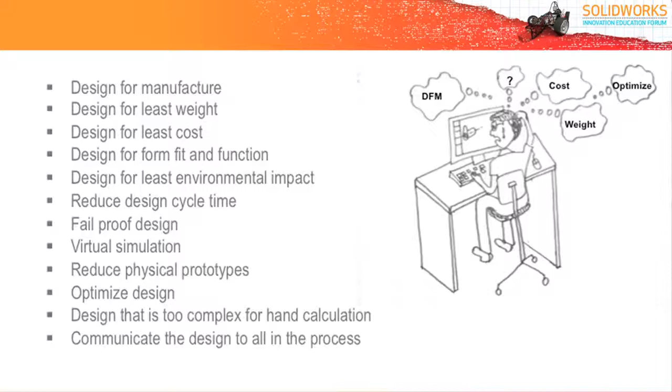Let's move on. So what are the industry expectations? One is design for manufacture, design for least weight, design for least cost, design for form, fit and function, reduce design cycle time, design for least environmental impact, fail-proof design, virtual simulation, reducing physical prototypes, optimizing the design, design that is too complex to do using hand calculations, and above all, communicating all this design to the other people in the enterprise.

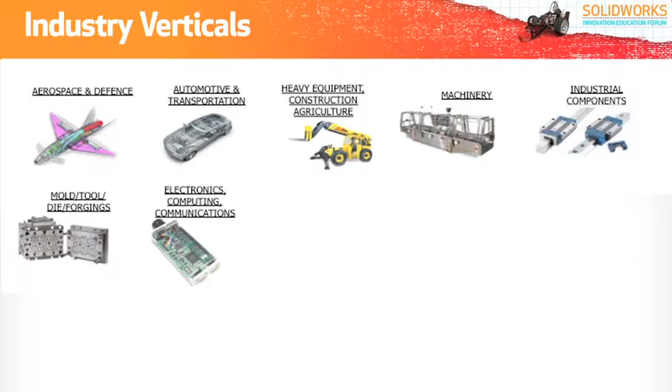So which are the industry verticals that have these challenges? All industry verticals, what we know. One is aerospace, automotive segment, heavy equipment, machinery, industrial components, mold, tool and die, electronics, medical equipment, consumer products, green energy, power and process, scientific equipment, shipping, and all other industry segments have these challenges. And of course, the design and engineering services which offer all these services to these industry verticals also have these challenges. So every industry segment you can think of has all the challenges we discussed before.

So let's look at these challenges one by one. One of the design challenges is design for fit and function. You would have learned in your academics how to give tolerances, and about different types of tolerances like running and sliding fits, location and assembly fits, and transitional and interference fits. Some of the fits you would have learned are press fit, drive fit, and shrink fit.

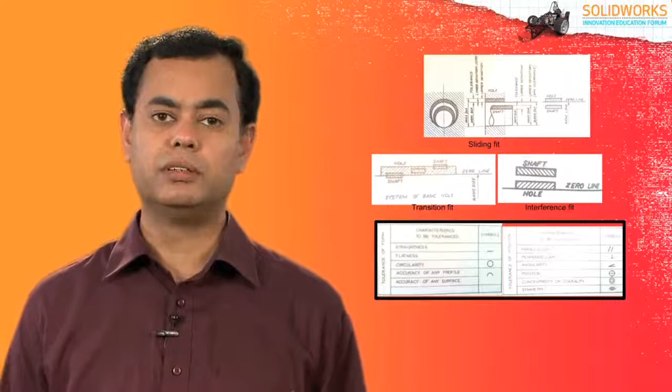Now you know what are the different types of tolerances you need to give to the components so that these can sit in the assembly in the appropriate position. These are very important as far as design of a product is concerned. You know how to do this, but this also poses a challenge of what we call tolerance stack-up. What is this tolerance stack-up all about?

Let's take an example of a gearbox to demonstrate this functionality of tolerance stack-up. Now what you see on the screen is a worm and worm wheel gearbox. There is a dimension which controls the position of these two shafts here, 35 mm. This 35 mm is very important because the two shafts have to be positioned accurately so that the function of the gearbox is not affected.

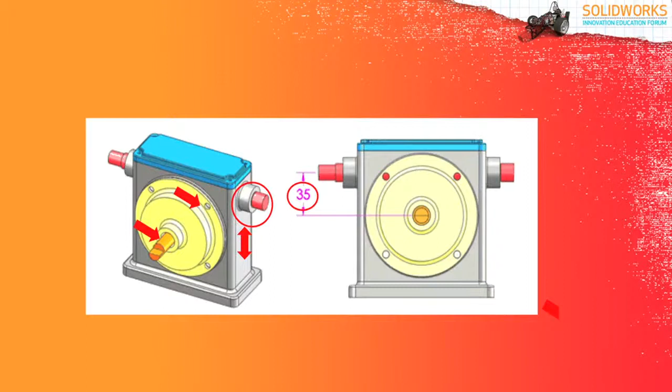Now this 35 mm is controlled by many different dimensions and the tolerances given to different components in the assembly. For example, the tolerances given for this particular bore, which can go up and down based on the tolerance level, and also the position of this hole can be affected because of the tolerances. This also affects the position of these shafts. Not only this, the bore can be out of concentricity from the position of this particular flange here. So many different things affect the position of the two shafts here.

So in SolidWorks we have a nice tool called TolAnalyst. This is going to help you do this tolerance stack-up without any pains. So how do we do this in SolidWorks? What you need to do is just tell the system what is the sequence of assembly in your gearbox, and also tell which are the primary and secondary tolerances which are going to control this positioning.

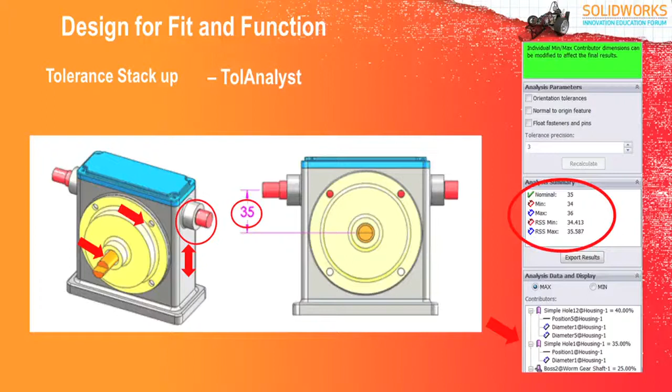So if you specify all these things, SolidWorks is going to give you a nice beautiful result where it tells you the maximum and minimum stack up of tolerance values. It also gives you the RSS minimum and maximum. Not only this, it also tells you which tolerances are contributing maximum to the overall tolerance buildup. Based on this, you can decide which tolerance to control so that the overall tolerance stack up or limit can be controlled. This is a very quick and easy way of doing it in SolidWorks, which helps you do it faster compared to the conventional method of putting everything in an Excel sheet and calculating the overall stack up.

This becomes even more complex if you are working on a very complex assembly where there are a lot of parts involved in it and it's working in 3 dimensions. So this is a day-to-day industry challenge which you would face when you start building or designing your own product. So this is an easy to use tool, very quick, and you can solve this problem in no time. That's what TolAnalyst is all about.

Let's move on to the next industry challenge of design for manufacturability. Well, you would have learned very little about this in your academics, but this is an important factor in an industry, design for manufacture. If you are not designing the product which can be manufactured, then it results in escalation of cost, rework, and wastage. So this is a big problem in the industry. So design for manufacture is very, very critical, and every component has to be designed for manufacture.

Now, what are the things? Let's look at some examples of design for manufacture. One is the drill size versus the depth of hole. If the hole size is very small and the depth of the hole is very long, this results in the drill bit being broken. This is one example. Another example we can talk about is the corner radius when you do a turning operation. Can this radius be manufactured in my manufacturing setup is a question. So we need to design products which can be manufactured in our industry setup.

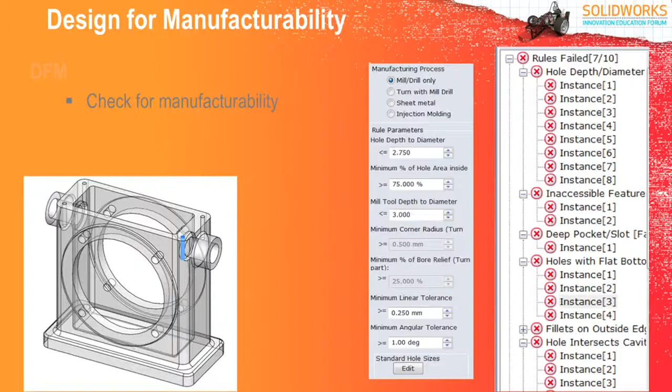Any type of 3D model can be designed or modeled, whatever comes to your mind, but can it be manufactured is a question. So we have a nice tool in SolidWorks called DFM Express, which helps you to create a template and define all the criteria that fits your manufacturing setup, and then you can check each and every component, whether it is conforming to the standards you have specified in design for manufacture. So this is an easy to use tool which tells you upfront whether this part has got some discrepancy with respect to the manufacturing ability available in your factory. This is what design for manufacture is. This is another challenge in an industry which everyone faces.

Let's move on. Another challenge the industry faces is design for least cost. Why should we design for least cost? One is the company wants to make more profit. They are looking at profit margin. Another one, they want to stay competitive with respect to their competitors. Now these two are the most important factors, and cost plays an important role to achieve these two.

We have a nice tool in SolidWorks called SolidWorks Costing, which helps you to compare costs of different design variations. For example, if you change the material of the same part, how does it affect my cost? This can be calculated. And if you change the geometry, how does it affect the cost? That can also be calculated. And if you change the manufacturing process and want to find out the cost for different manufacturing processes for the same component, then you can do that as well.

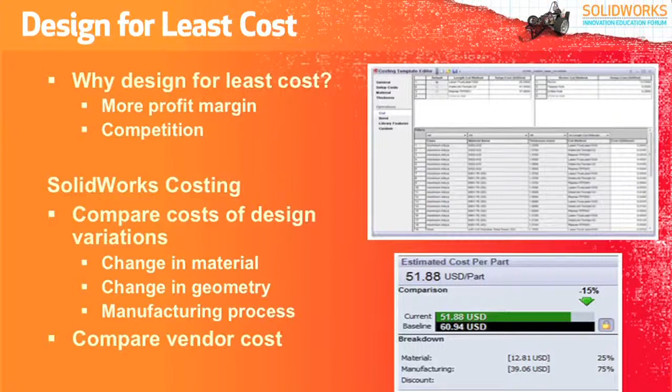In SolidWorks Costing, we have a nice template which can be built, and you can specify the criteria based on which you want to check each and every component for the cost. You can specify the manufacturing processes, the cost involved, and the cost of material. All this can be fed and kept as a template, and then you can apply these templates to every component you design, and this is going to tell you the overall cost of this particular part or assembly. Not only this, it also helps you to compare the cost of giving it to different vendors. So this is a very quick and easy method of doing it.

A primary responsibility of any mechanical engineer is to ensure that the proposed design will function as intended, safely and reliably for the prescribed design lifetime, and at the same time compete successfully in the marketplace. Success in designing competitive products while averting premature failure can be consistently achieved only by recognizing and evaluating all potential modes of failure that might govern the design of a machine and each individual part within the machine. There are many modes of failure in a machine. One of them is fatigue failure.

In metals, fatigue is caused by repeated cycling of the load. It is significant because it will occur due to repeated loads below the yield strength of the material. You can see the graph here that shows how fatigue life increases with decrease in stresses.

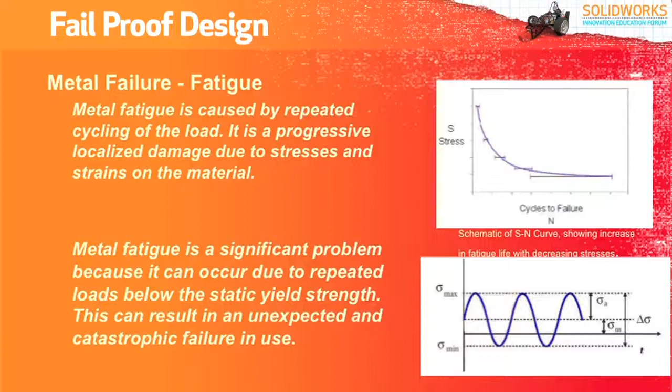Let's look at the graph here, which shows the stress versus the number of cycles to failure. This shows that at lower alternating stresses, the life is extended, and for every material this SN curve is available, which you can use for predicting the failure. But how do we do this in SolidWorks?

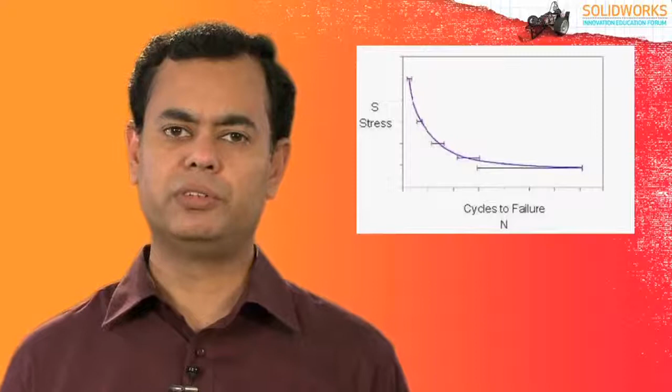Now let's take an example of a real life case. In this case, I'm going to consider an automotive suspension system. What you see on the picture is a double wishbone suspension system of an automobile. You all know that this suspension system is subjected to repeated loading or random loading due to undulations in the road.

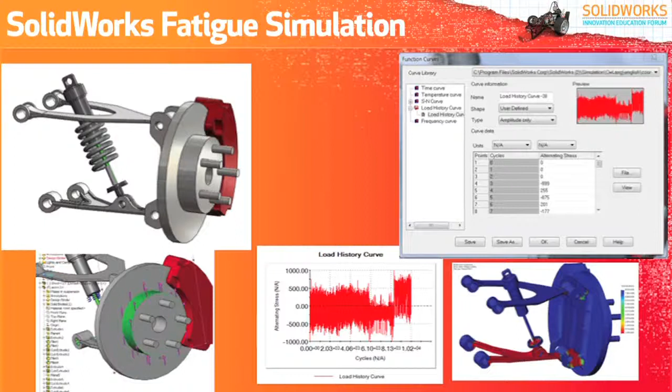What is the typical way to do this? The ideal way is to take external data or do a physical test, bring the physical data into the system and then apply it to the assembly to predict the failure. What you see on the screen is a load history curve, which is nothing but the loading pattern taken out from a road test, and this is applied to the assembly, and then the fatigue failure is predicted. The system within no time tells you the total life of the particular component based on this type of loading.

This tool integrated with CAD helps you to do the fatigue simulation very quickly, and also helps you make the necessary changes in the CAD design so that you are able to evaluate the lifetime of a particular component and design it for the specified period without failure. This is an important criteria in industry, not only in the automobile industry, but in many different industry segments, as far as any machinery is concerned.

Reducing design time is another important challenge always faced by product designers. Many times a conventional method or process may be very time consuming. One such example is a cam design. You would have learned how to do a cam design in your engineering. For a particular motion, you do a displacement diagram, measure those distances, plot them on a circular shape and then derive the cam profile. You know how to do this.

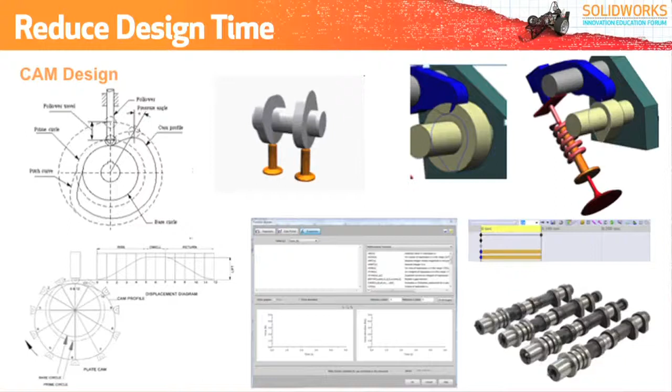But when you walk into an industry, the same process can be applied, but it may be time consuming if you have to do the design much faster. So how do we use SolidWorks to do this? In SolidWorks, you model it in 3D, make all the components in the assembly, and make the assembly function as per your requirement. The motion can be achieved by giving the input to the mechanism you have designed in the software.

How do we give the input motion to this particular assembly? By different methods: using expressions, using data points, writing an equation, or many different ways with which you can give an input to a mechanism and make it work the way you want in the software. Once you run this mechanism, you can trace the tip of the follower to derive the cam shape automatically.

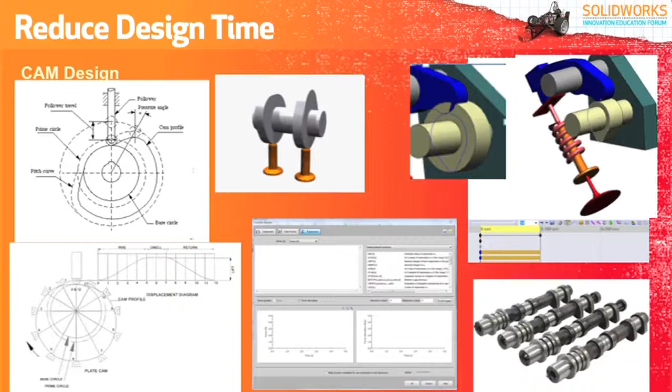If you see the picture on the right hand side, you can see the cam profile being sketched on the circular component there. Using this, you can cut off the material and create the cam shape very quickly. So this is a very easy to use application where you can design your cams very easily and also accurately.

Another very frequently used design theory is balancing of masses. This is very critical in all rotating machinery or where there are rotating bodies. Out of balance forces lead to increase in bearing loads, introduce stresses in the rotor, and also introduce vibration and noise. Care should be taken to keep the imbalance to the minimum or balance it with suitable substitute masses.

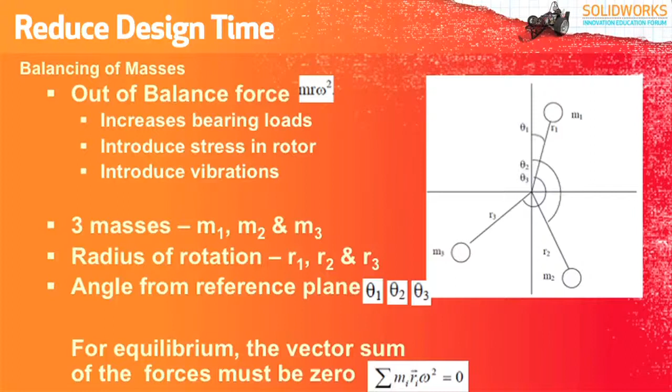You would have learned this theory of out of balance force, which is m r omega square, where m is the mass, r is the radius at which the center of mass is located, and omega is the angular velocity. Theta is the angle at which it is located with respect to a reference plane. For equilibrium, the vector sum of all the forces must be 0. This is theory of balancing of masses as you know it.

How do we handle this in SolidWorks? Let's have a look at it. A typical example I can think of is an IC engine of an automobile. As the piston reciprocates, there is an imbalance of cyclic forces at the crankshaft. Imbalance is also added due to imbalance of masses in the crankshaft itself. We need to find the total imbalance in the mechanism and minimize it. That's what is our goal here.

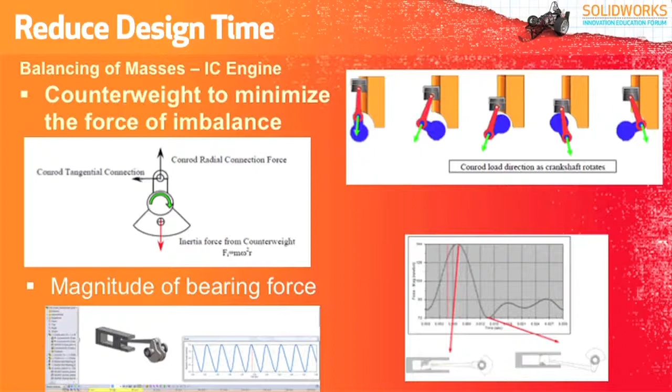Again, SolidWorks Motion comes to our rescue and helps in plotting the reaction forces on the bearing of the crankshaft. This helps us to find out at which instance during the motion there is an increase or decrease of forces. With this, designers can do the necessary changes to the design and calculate the imbalance of forces in the mechanism.

You can see in this picture where the graph shows the magnitude of force as the crankshaft rotates. What is good about SolidWorks Motion is that the joint definition of the mating parts are automatically taken based on the assembly mates which you have used to build the assembly, helping you to design faster and also calculating the imbalance of forces very quickly. This definitely helps you to reduce the design time and come out with your design very quickly.

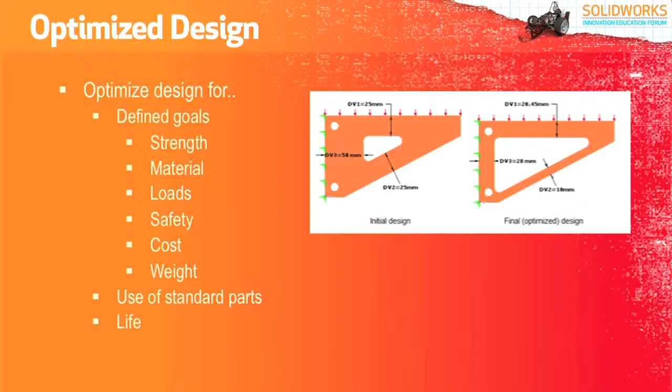Optimized design is another industry challenge which is very important. Every product that you design has to be optimized for its defined function. It cannot be over designed or it cannot be under designed. So optimized design is very, very important. Product is optimized for its defined goals like strength, for its material, for the loads it can carry, for its safety and cost and weight. So you need to optimize the design so that these goals are taken care of.

Sometimes product is also optimized for using standard parts so that the cost can be brought down. Products are optimized for a specific life so that your product does not work beyond the specified period, as sometimes technology becomes obsolete beyond that period of time. So let's take an example here of how we can optimize the design.

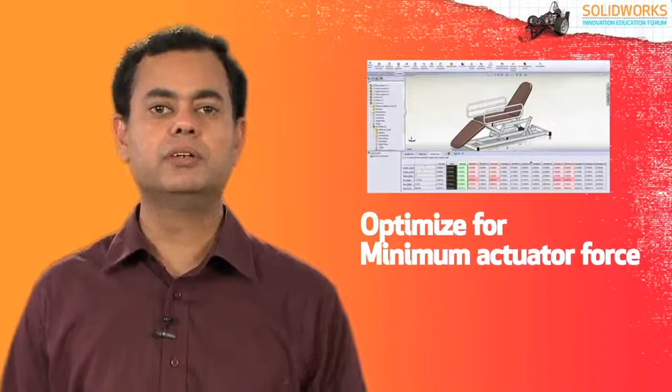In this case, we have a medical examination couch where we need to design the couch in such a way there is an actuator which experiences the least forces. We need to locate the actuator in the right position so that it has the least forces, number one. Number two, we need to use a standard actuator. Number three, we need to modify these dimensions so that the actuator is mounted or located properly in the entire mechanism. At the same time, the height of the couch has to reach a particular distance. It should not go beyond that, or it should not reach a lower level.

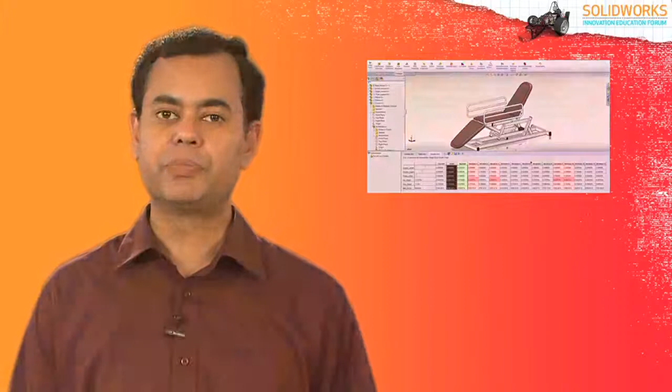Now these are the goals and constraints with which you need to design this particular product and come to a conclusion. With all these constraints and variables, arriving at a solution is going to take a very long time in a conventional method. Every design variation you need to work out and then find out whether it is right or wrong. So if there are too many variables and constraints, to do it much faster, you need to use the software tool to arrive at the optimum design. This complex design situation is easily handled with SolidWorks Motion Optimization.

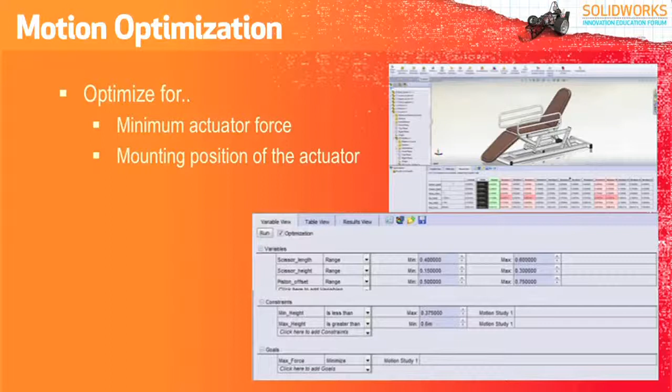Here we can specify: 1. Which are the dimensions and parameters to modify and the range within which they can change as variables. 2. What are the constraints within which it has to do these changes. And 3. The goal of minimizing actuator load. All this can be given as input, and the software does multiple iterations or design variations to achieve the goals set. This process is so fast and accurate, whereas otherwise doing such an exercise would be too tedious.

Another area I would like to discuss that involves a complex design challenge is the area of fluid dynamics. Let's consider a centrifugal pump that is widely used in many industrial segments. A centrifugal pump is one of the simplest pieces of equipment.

Its purpose is to convert energy of an electric motor or an engine into velocity or kinetic energy and then into pressure of a fluid that is being pumped. The energy changes occur in two main parts of the pump, the impeller and the volute. The impeller is the rotating part that converts driver energy into kinetic energy. The volute is the stationary part that converts the kinetic energy into pressure.

Liquid enters a pump suction through the eye of the impeller. When the impeller rotates, it spins the liquid sitting in the cavities between the vanes outward and imparts a centrifugal acceleration. As the liquid leaves the eye of the impeller, a low pressure area is created at the eye, allowing more liquid to enter the pump inlet. Centrifugal pumps are classified into three main categories: radial flow pumps, mixed flow, and axial flow pumps.

To design a pump, we need to calculate the efficiency of the pump, where it is the ratio of power input to the power output. Head of the pump is governed by the equation H is equal to P2 minus P1 by rho g plus V² by 2g, where H is the total head developed, P2 is the pressure at outlet, P1 is the pressure at inlet, rho is the density, g is the acceleration of gravity, and V is the velocity at the outlet.

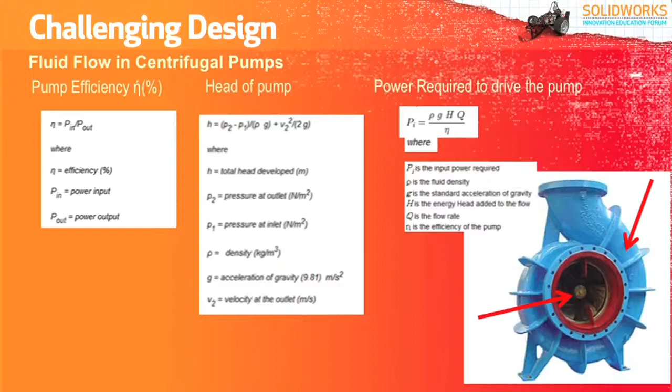Also, the power is governed by the equation Pi is equal to rho g H Q by η, where Pi is the power required, rho is the density of the fluid, g is acceleration due to gravity, H is the energy head, Q is the flow rate, and η is the efficiency of the pump.

Though these can be done through hand calculations, the challenge lies in determining what shape of the volute is needed to get the required pressure at the outlet. This is difficult with hand calculation. This is achieved with ease in SolidWorks flow simulation. Let's have a look at how we can do this in SolidWorks.

The 3D model of the pump is quickly modeled in SolidWorks, and the fluid region is automatically identified by the system. Other inputs like inlet volume flow rate, outlet atmospheric pressure condition, wall roughness, and angular velocity of the rotating regions are all given as input. SolidWorks solves this problem and gives the pressure data at the outlet, velocity and other flow parameters.

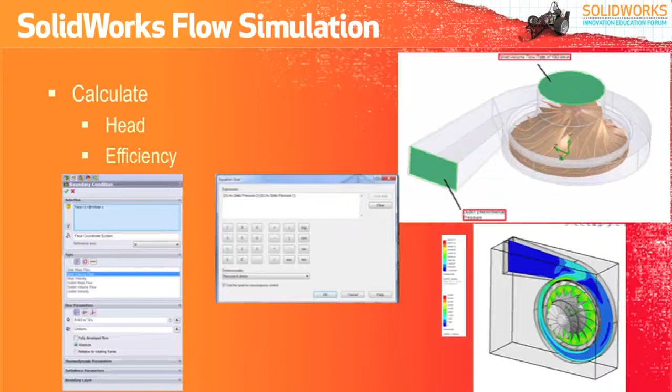Using this, equations can be written to calculate the head and efficiency, which are derived by the software automatically. Flow trajectories can then be plotted and visualized, and a report can be automatically and quickly generated. So with this, we are able to arrive at the right design quickly without much hand calculation. The software is going to help you do this very fast. This is quite a complex analysis where a conventional method of hand calculation is not going to help you much. Software is going to help you do it and achieve the results much faster.

SolidWorks has many functionalities that can be used in learning the concepts of engineering. At the same time, the skill sets that the students learn are easily and effortlessly used in solving industry challenges. To demonstrate that the SolidWorks simulation solution is accurate, we have included NAFEMS benchmark problems in the validation examples under the help menu in SolidWorks.

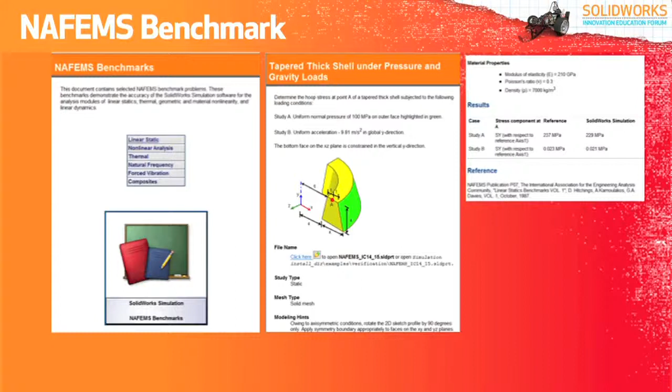NAFEMS, which stands for National Agency for Finite Element Methods and Standards, is a vendor neutral, non-profit membership association of more than 950 companies from all over the world. Members range from major corporations such as Boeing through mid-sized companies to small consultants. The document given along with your software contains selected NAFEMS benchmark problems. These benchmarks demonstrate the accuracy of SolidWorks simulation software for the analysis modules of linear statics, thermal, geometric and material nonlinearity, and linear dynamics. You can use this to learn the concepts of engineering, and at the same time apply them in real world examples using SolidWorks.

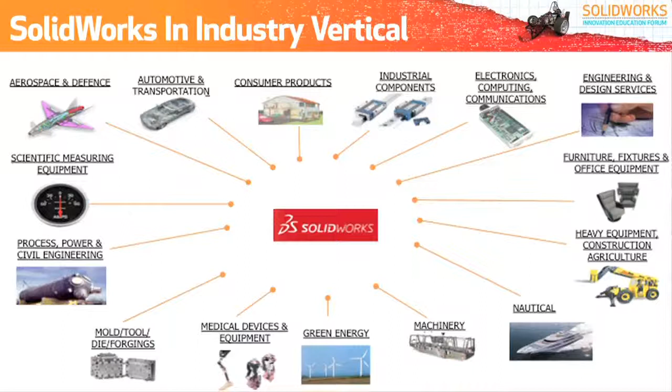SolidWorks is present in all industry segments. There are more than 1.65 million users and around 152,000 customers worldwide. Many large, medium and small companies have adopted SolidWorks for their product design. These companies have implemented SolidWorks successfully to meet their design goals. Students coming out of colleges can rely on their skills in SolidWorks to embark on their journey into this globalized industrial world.